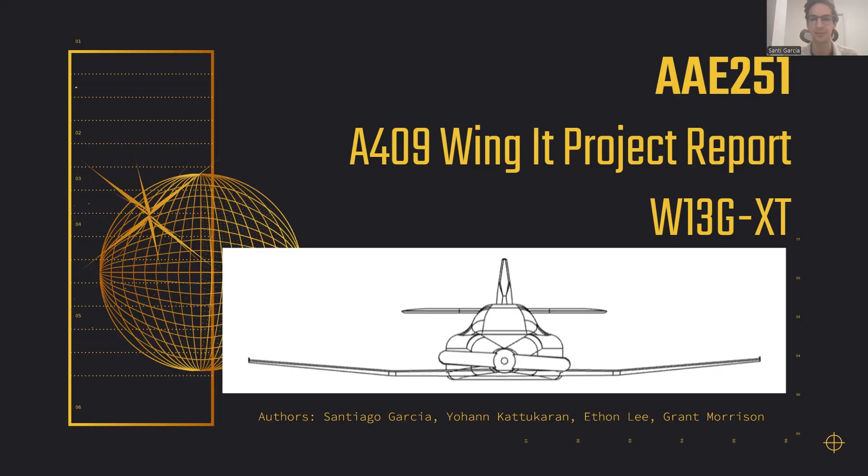Hello, we are team A409, and this is our project report. My name is Yohann Kattukaran. My name is Grant Morrison. My name is Santiago Garcia. My name's Ethon Lee. And we are proud to present our aircraft, the W13G XT.

All right, so we have two stakeholders throughout this project that we've come across: the pilot and the Reno Air Racing Association. Basically, the pilot wants a safe and reliable aircraft that they can easily operate while going through the race. Meanwhile, the Reno Air Racing Association wants us to follow all the guidelines that they've established, such as the FAA guidelines and stuff like that.

Specifically, the pilot wants structural capability, so to withstand 6G. So the plane has to be able to support strong weights. It has to follow FAA guidelines for the association and meet the takeoff and landing requirements. Those are just basic examples.

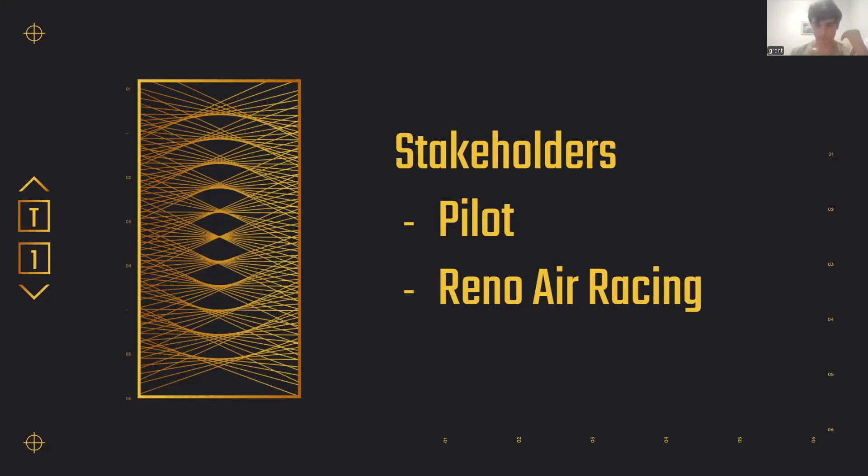And now for the risks, there are around six risks, which are bad weather, engine failure, birds, structural integrity, and landing wheel issues. For bad weather, weather can affect the pilot's visibility. It can affect how the engine works or anything like that. Engine failure can happen mid-flight when the engine just stops working as a whole, and then the plane may have to land, or in worst cases, it might crash.

Birds can collide with very important parts of the plane, such as the engine or the turbine, and can stop them from working if the collision provides a significant amount of force. For structural integrity, the plane can sometimes fall apart, like the wings can fall apart mid-flight. And landing wheel issues are when the plane's landing wheels do not extend or retract fully, which can create a problem when it wants to take off or land.

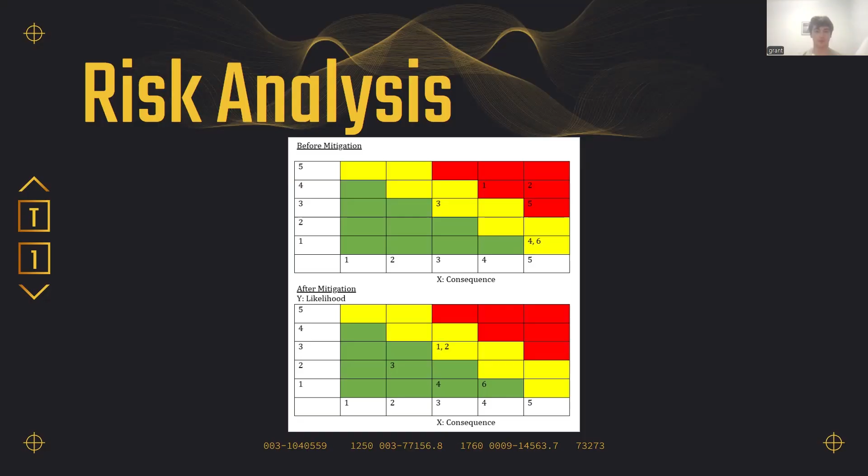Once we were able to attain the P-51D's values, we used them to estimate our initial gross takeoff weight. From this calculation, we were able to calculate wing loading. Then we used wing loading together with our gross takeoff weight calculations to find the dimensions of our aircraft. And from the dimensions, we were able to arrive at a NACA airfoil. The NACA airfoil of choice for the wings was the NACA 2412.

And we arrived at two different tail airfoils. The NACA 0012 was selected for our vertical tail, while the NACA 0010 was selected for our horizontal tail. The NACA 0012 was selected for the vertical tail as it had to sustain more structural loads, while the NACA 0010 was settled on for the horizontal as it is subjected to less loads.

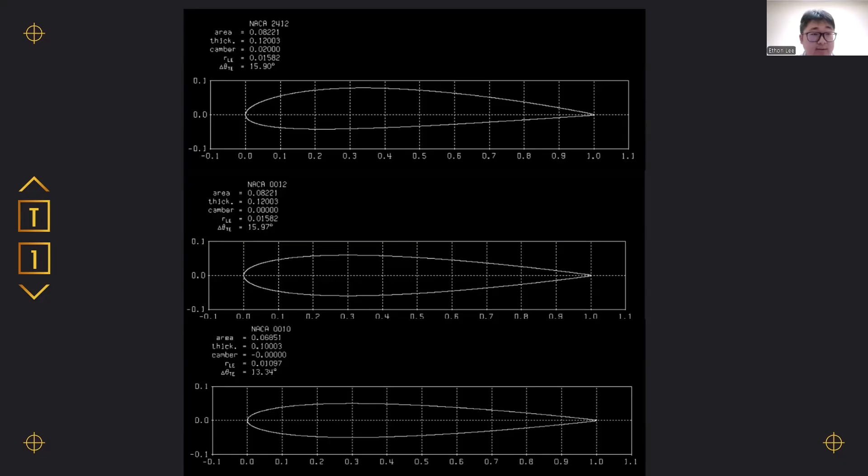After calculating all of these values and selecting other ones, we came up with three different concept aircraft with different variations. For example, we looked at a high wing aircraft versus a low wing aircraft, and we also analyzed different types of landing gear: tricycle landing gear, the tail dragger, and retractable landing gear. We also analyzed the placement of the horizontal stabilizer, for example, a T-tail versus a conventional tail.

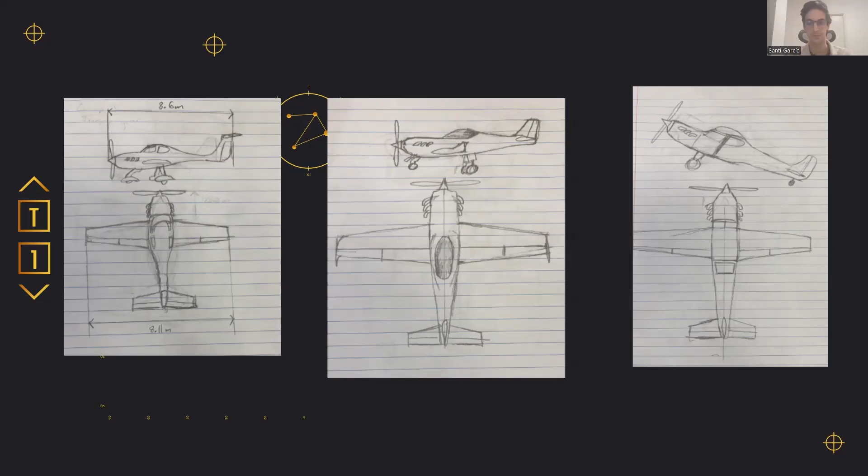Another important modification was the cockpit placement, because we had to consider how the pitching moment of the cockpit positioning would affect the overall aircraft balance given the heavy engine. Through all that, we reached our final design, which incorporated tapered wings and a cockpit placement behind the wings for better weight distribution, because we used the Merlin engine, which is placed at the front, and that moves the center of gravity forward. So we put the cockpit behind the wing to even out that balance.

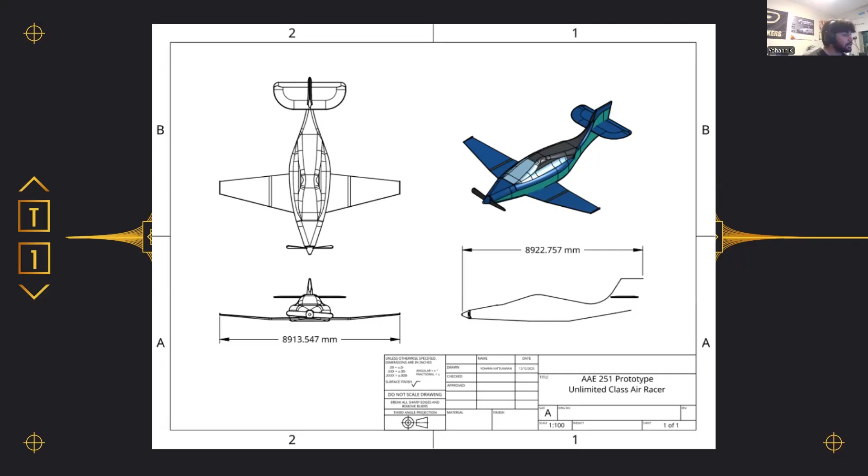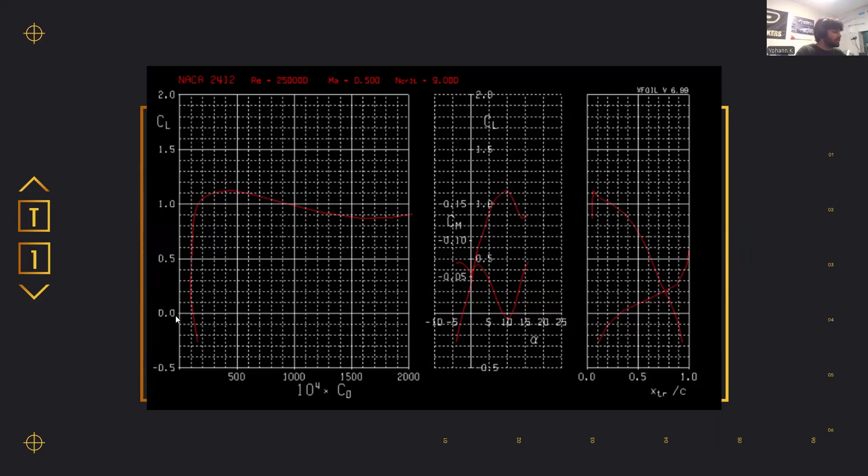And then we decided to go with retractable landing gear for more aerodynamic efficiency. We chose tapered wings because their structural and maneuverability efficiency is better than elliptical wings or other wing styles, and it allows the plane to be fast and competitive in the race. Through the airfoil, we got our NACA 2412. We found our CD0 by graphing the CL and CD chart, and got a CD0 value of around 0.012.

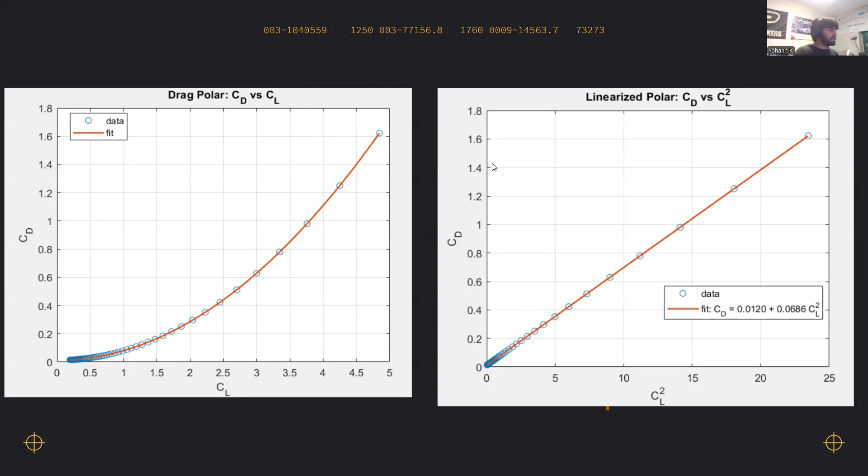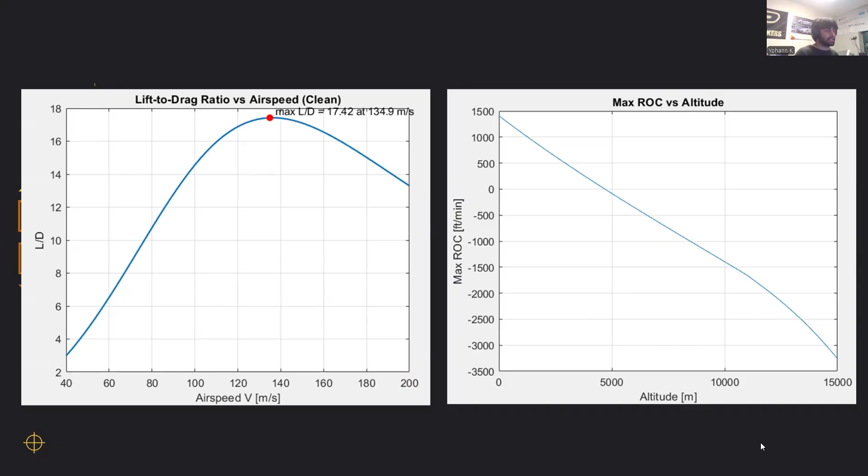Through that, we could plot our drag polar and our linearized polar graph, and through other calculations, found our power required and thrust required versus available. We could also find the max lift to drag ratio, L/D max, at the specific speed, which is around 17.42. And over here, we have our max rate of climb versus altitude. And here are some main takeaways that we have.

During the development of this project, we faced several challenges that required us to change our approach and refine our engineering judgment. A clear example was when we started our sizing code, we realized very quickly that the coefficients we were using, based on Raymer Chapter 3, were outdated and didn't really apply to racing aircraft. So we had to go through our code, analyze how each coefficient affected our outputs, look for new applicable coefficients, and find a justification for using them.

Another very important thing we learned was the importance of making informed trade-offs. For example, when choosing a NACA, you have to decide between a more aerodynamic, efficient NACA and more structural integrity. So we had to analyze the G loads required for the aircraft versus the aerodynamic efficiency. And we basically had to make trade-offs like this for every single component of the aircraft.

And so after this thorough performance analysis, we found that our aircraft does meet all the necessary requirements for the unlimited class air race. And we believe our aircraft would successfully complete the mission.